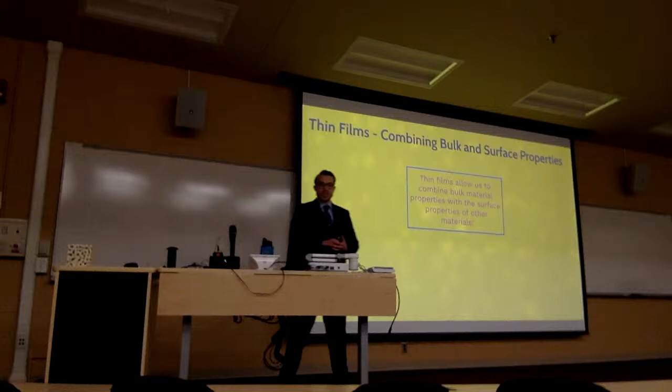Thin films as a class of materials allow us to combine bulk properties in materials with the surface properties of other materials. Whether we're talking about protective coatings, microelectronics, optical coatings, decorative coatings, or even tribological or hard coatings, just by applying a thin layer of material onto another, we can enhance the properties of those materials.

Now the performance of thin films in all of these applications depends strictly on how they're designed on the nanoscale. This is the crux of the story we're going to share with you today, so keep that in mind.

How thin films are typically engineered or designed is through a process known as physical vapor deposition. What the name implies is that we're actually vaporizing a material in a chamber, and it allows it to condense onto a substrate, another material, in very thin layers, in atomic layers, to grow a thin film material.

Why we use this process is that PVD allows us to control certain aspects of the microstructure, namely the shape, the spacing, the crystallography, and the chemistry of the thin film, which again plays into the properties in those applications I described before. So typical thin film architectures look something like this.

On the left, you have a fairly simple case where we deposit a material onto a substrate, and it might have some grain structure that we can describe with one length scale D. That's the grain size of that material.

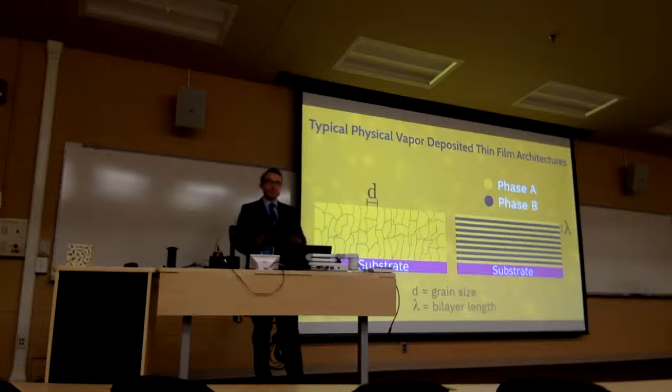Another material is actually a composite of two or more materials that we've layered sequentially in a multi-layered stack. We can also describe this with one length scale, lambda, and this is the bilayer length scale for that material.

Now this material on the right, this nanocomposite, is actually a very interesting material as it has interesting mechanical properties. I'll tell you why right now.

If we take a material, say copper in the bulk, which has a hardness of roughly 350 megapascals, and take another material, niobium, which has a higher hardness, you might think that if we combine these two materials in a composite, the hardness would be some value in between those. But in fact, if we make a thin film material at some layer thickness, say 40 nanometers in this stack, it has a high hardness, not between these two values, but much, much greater.

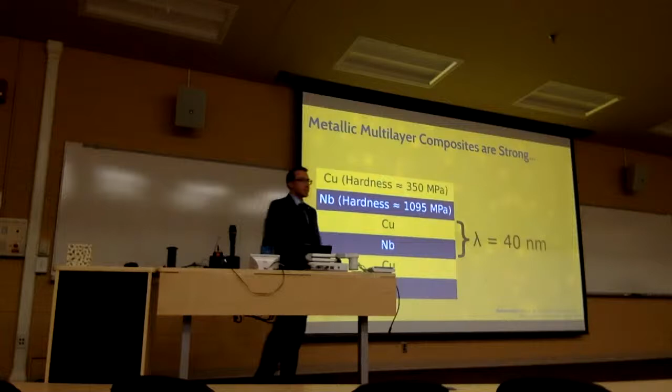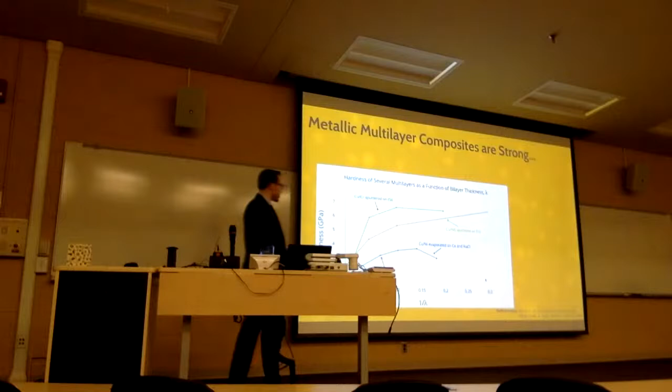Ultra high strength in this thin film architecture. In fact, that lambda parameter, as we decrease it in this plot here, which you can see going towards the right as a measure of hardness, you can see that as we decrease the lambda value for that nanocomposite, we increase the hardness of those materials.

So you might be thinking, well, that's great, we have ultra high strength in a material. So what's the problem? Well, if we load this sample up in compression, so we make this micropillar and compress it down, deform it, it actually has these ultra high strengths, but it fails very suddenly like a brittle material.

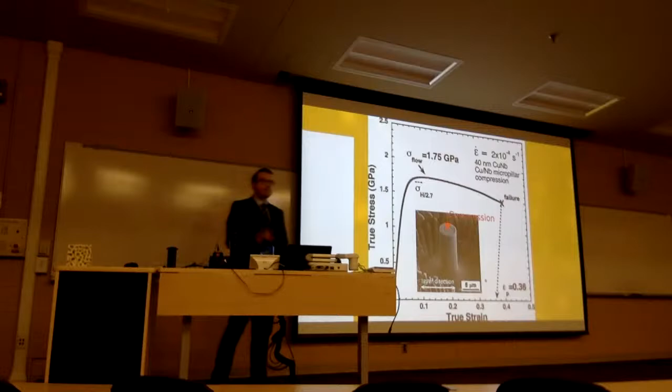The reason for that is this is the post-deformation sample. We can see that the plastic flow that we've created during deformation localizes into a single region in the sample known as a shear band, and that material fails very suddenly like a brittle material.

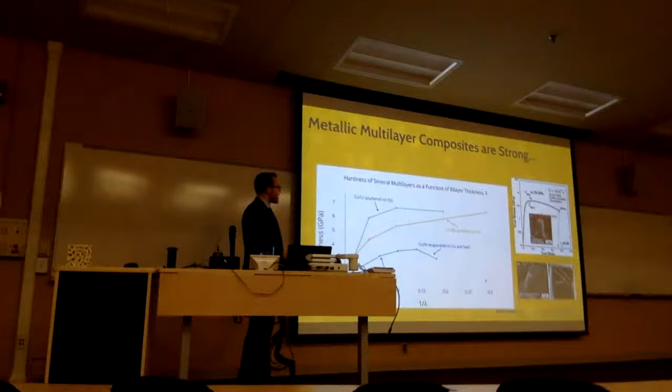So the question we ask in these nanocomposites: while we have the high strength in the material, they behave like a brittle material. Could we design a nanocomposite instead that's highly deformable but still has that ultra high strength in the material? We saw this as a design problem.

Previously we had these multi-layer stacks that fail suddenly. This is a TEM image of that sudden failure after deformation.

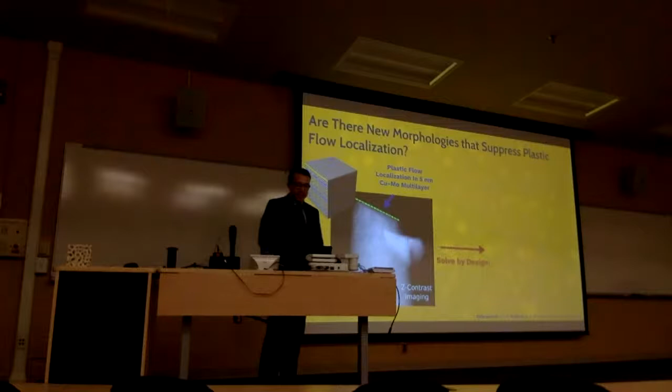What we saw is if we could possibly design a structure that instead looks like this, which you notice has interfaces not in 2 dimensions anymore, but in 3 dimensions, we can possibly distribute strain much more uniformly in the sample during deformation. So the question we ask then is, how do you engineer a material that looks like this?

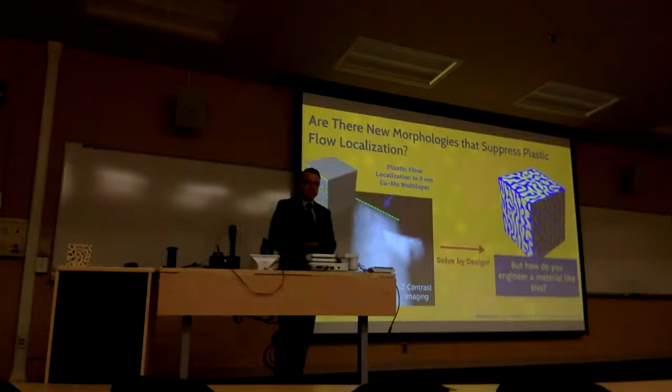Well, in fact, this structure here looks like, to some of us in the room, a phase-separated alloy, a phase-separated structure. And to a material scientist, phase separation looks something like this.

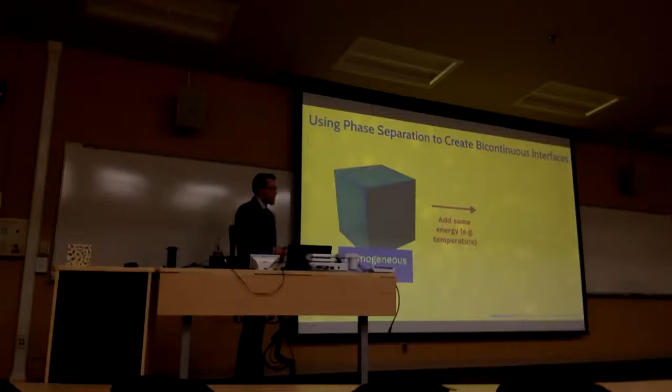We take a homogeneous alloy of a certain material combination, we give it some energy, for example temperature, and we can phase separate that alloy into 2 distinct domains—in this structure, the yellow and blue domains. We can actually design very sharp interfaces between those phase boundaries. Now, I said this occurs for very specific combinations of materials.

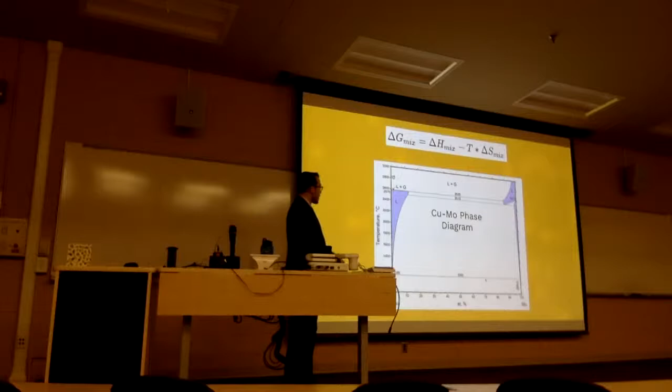What are those combinations? Well, if we look in our thermodynamics textbook, those are materials with high heats of mixing. These are materials that do not like to mix. For example, the copper-moly system. This is a copper-moly phase diagram where you can see it maps out temperature and composition, and you can see that this system is very insoluble.

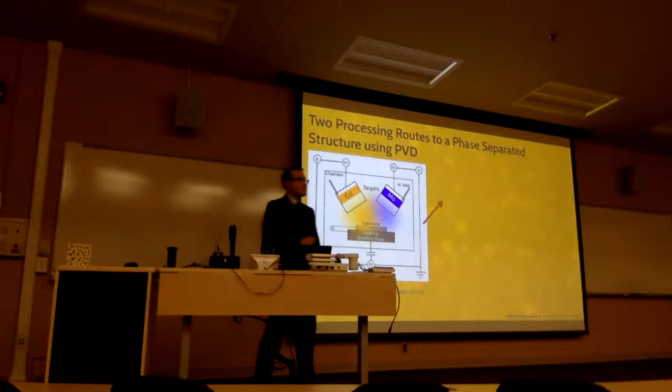An alloy or thin film that looks exactly like this on the right. So you can imagine doing this a few different ways using physical vapor deposition. Take, for example, we have a copper target and a moly target. We condense that onto a substrate. We might form a homogeneous alloy like I described before. We deposit an equal amount of those two materials. We could heat it up, and we could form this 3D bicontinuous-like structure that I described before.

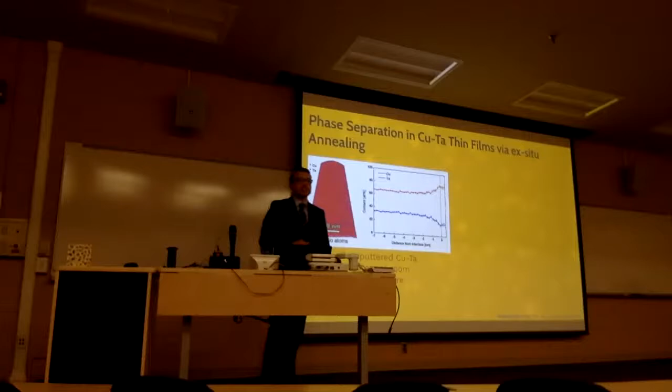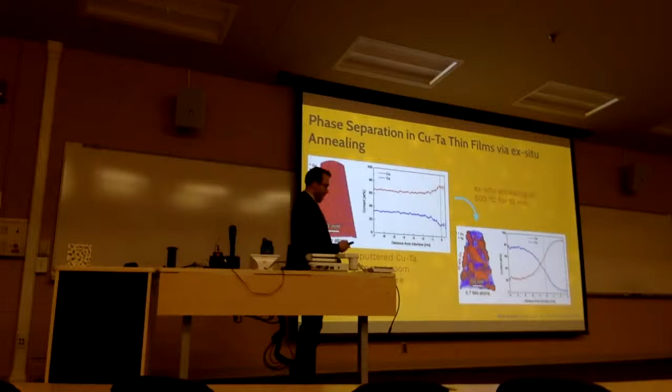We've actually seen this in the literature. So this is an example of a co-deposited copper tantalum system where the alloy at room temperature is homogeneous in the atom probe study here. We give it some temperature, and you can see that by adding temperature, we form this bicontinuous-like morphology for the copper and tantalum system.

So you might be saying, well, that's great. Why don't we just copy that processing route? Well, the problem is that it's kind of cumbersome. We have to take the alloy out of the chamber, we have to heat it up, and the resultant morphology is actually the same every time we do it. So we're actually limited in the number of morphologies that we can achieve using that processing route.

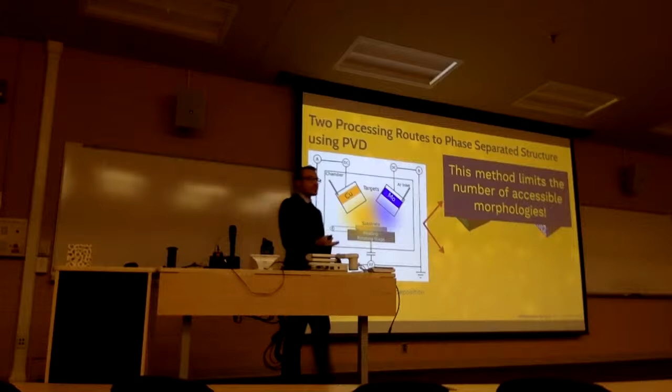So we thought, well, why don't we change it up? We can actually add energy during deposition by heating the substrate. So why don't we add temperature while we're depositing the material? We thought that in that case, we might be able to expand the number of morphologies that we could deposit using this processing route.

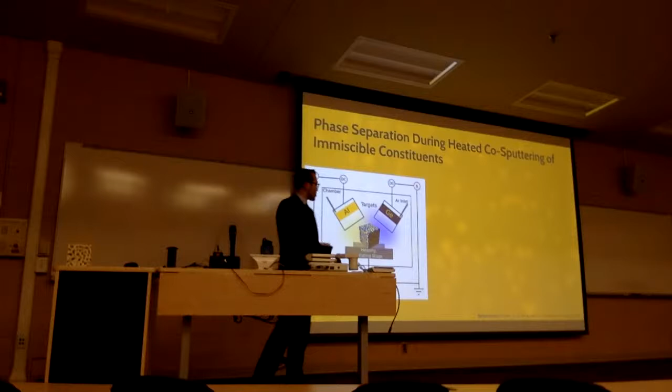We've actually seen this in literature as well. Actually led by one of my committee members, Dr. Michael Atzmon, led a study where they co-deposited aluminum germanium onto a heated substrate. And what they found was a bicontinuous-like morphology. Here are the resultant morphologies. You can see the aluminum-rich and germanium-rich phases highlighted here.

What they did was they varied the substrate temperature during deposition. What I hope you can point out here is that the sample coarsens as a function of substrate temperature. The domain size of the phase-separated architecture actually grows as a function of temperature. And that was one of the major findings of this work, is that we could actually control that phase separation process using the deposition conditions.

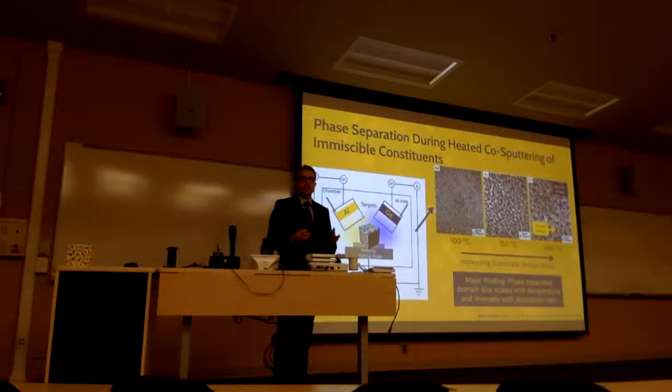So they actually tried to model this system analytically using one initial assumption, and that is that everything that's evolving, the concentration, is happening on the surface, the growing film surface. As in, the deposition time and temperature are such that no bulk diffusion is happening during deposition.

And so what they used was they used a Cahn-Hilliard formulation to describe this process, where they mapped out the concentration evolution over time as a function of the deposition conditions, namely the surface diffusivity, so how fast these atoms are traveling on the surface, the deposition rate, how fast we're adding material to the growing film, and the surface layer width, so how large is that layer that's actually evolving in concentration.

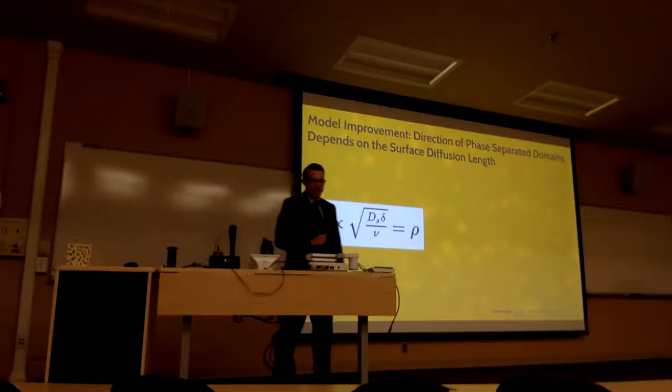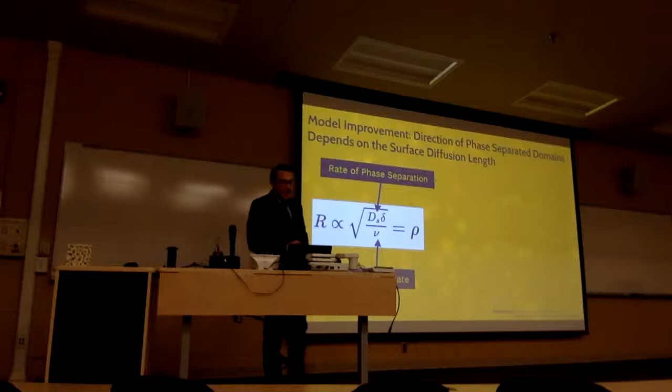This model was actually later improved upon by a group at Ohio State led by Yunzhi Wang, who saw this equation a little differently. They saw it as a competition between two different rates: the rate of phase separation, and the deposition rate during growth. The competition of these two rates can determine not only the size of the domains, but the direction of phase separation during thin film growth.

As a function of rho, this surface diffusion length, we can change the morphology or direction of concentration modulations in the sample. You can see these red and blue phases in this two-phase material. At high surface diffusion length, we have lateral concentration modulations, and as this rho value changes, we see the randomization of this morphology as a function of the deposition conditions.

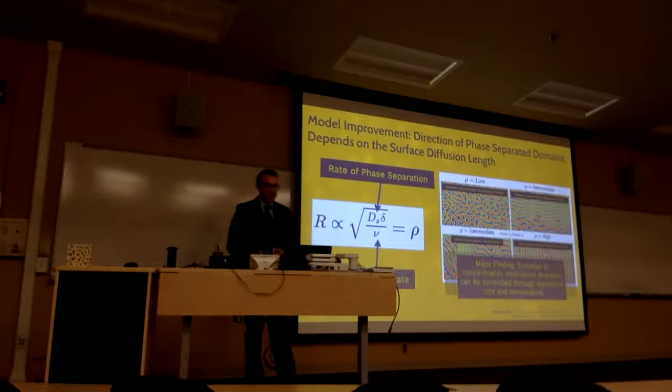So this was the major finding of this work: that you could change the direction of phase separation depending on the deposition conditions. We saw this as a scientific challenge. Could we take this understanding and replicate it experimentally during PVD deposition? Could we heat the substrate and give it the deposition conditions needed to change the surface diffusion length to change the direction of phase separation? Our hypothesis is that if we can control that diffusion length, we can control the direction of phase separation in these thin film morphologies.

I want to share with you the experimental methods we used for this study. We saw this equation as a function of deposition conditions. The two deposition conditions that feed into this equation are the deposition rate and the homologous temperature, which is the substrate temperature divided by the melting point of the material.

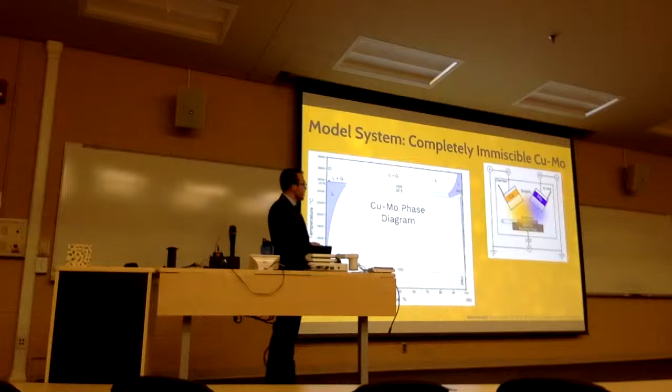We could deposit a matrix of samples to start seeing where those phase-separated morphologies fit on this morphology map. We took this ideal copper-moly phase diagram, a material system that is completely immiscible. We co-deposited it onto a heated substrate to force phase separation, and subjected it to a matrix of deposition conditions to map where those morphologies would fit on that morphology map.

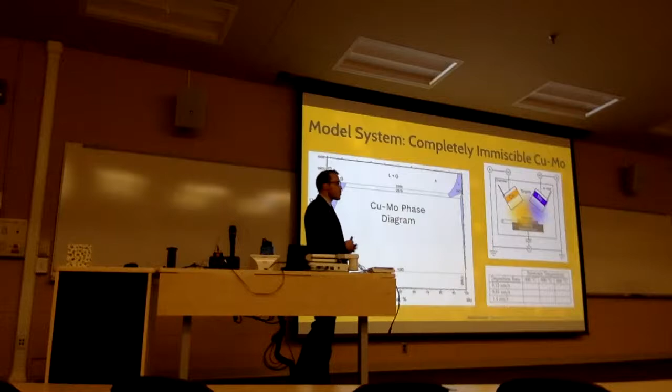We used a characterization technique known as scanning transmission electron microscopy to map out those phase boundaries and phase domains. We use atomic number contrast imaging to measure the shape and spacing of those domains. Chemical imaging can measure the chemistry of those domains. We look at the interface between the two materials in high resolution to examine the structure and defects of that interface, and we use electron diffraction to measure the crystallography and texture of the resultant films.

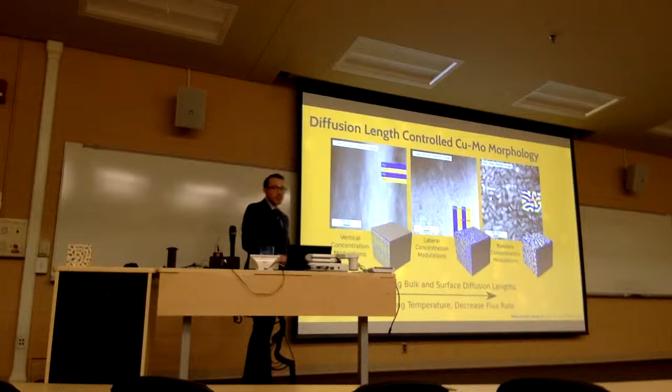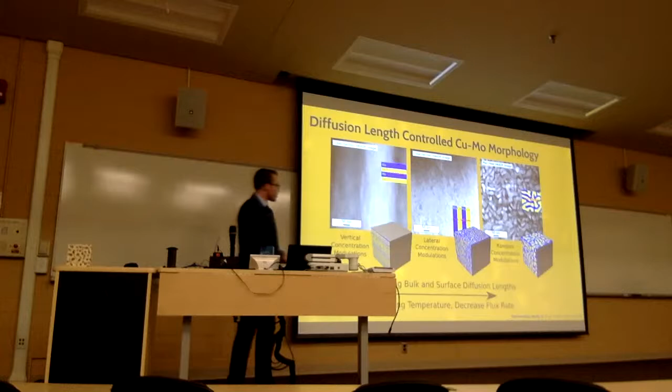So I've introduced that to you. What did we actually get? I'd like to share a summary of the thin film architectures we designed using this process. These are all atomic number contrast images, where copper is darker and brighter regions represent the moly-rich domains. You can see the length scale of these three morphologies and how the concentration evolves as a function of the deposition conditions labeled here. You don't have to take this all in, because we'll describe them each in turn.

At the lowest deposition temperature, we achieved vertical concentration modulations of copper and molybdenum. This is two views of the sample, one in cross section and one in plan view, looking down onto the film. The film growth direction is indicated in the cross section image. We have copper-rich and moly-rich domains stacked vertically in the sample, at a length scale of about 11 nanometers, which you can see in the chemical mapping image in the upper right inset.

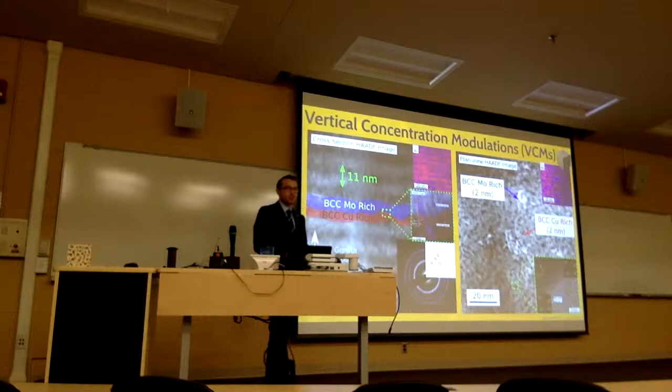If we look into these two domains, there's actual lateral character to the copper and moly-rich domains that extends into the thickness of each layer. What's really interesting is that if we measure the crystallography, we only pick up frequencies from the body-centered cubic crystal structure, represented by moly, which is the equilibrium moly crystal structure. But bulk copper's equilibrium crystal structure is actually face-centered cubic. So what we have here is a metastable copper layer, coherent with the BCC moly-rich layer.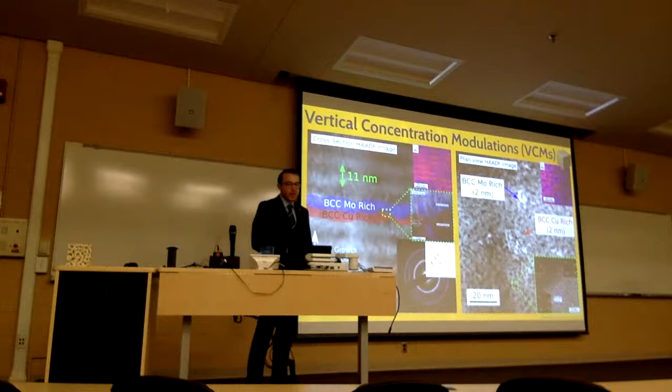I'll show you that in detail in just a second. In plan view, when we look at the sample from top down, you can see this tortuous-like morphology into the thickness of the film with copper and moly-rich domains. If we look at the interface between those two crystals in high resolution, you can see that copper is strained to match the lattice parameter of moly into a BCC crystal structure, forming a coherent interface between the two crystals.

So in summary, what we have is a crystallographically coherent, chemically separated vertical design of the material. At slightly higher temperature, we change the direction of phase separation 90 degrees into lateral concentration modulations of copper and molybdenum. You can see that in the chemical imaging at an approximate length scale of 7 nanometers.

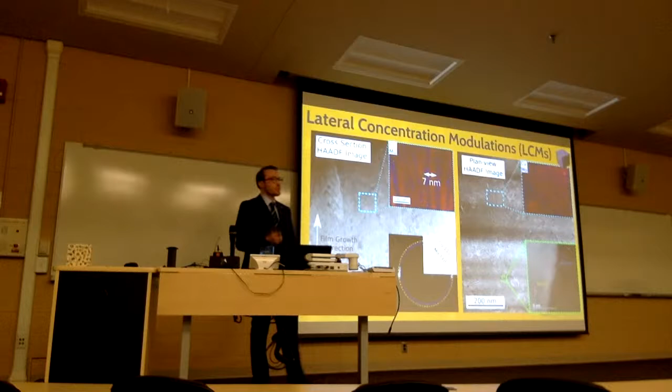If we take a look at the crystallography of the sample, what we see is actually the two equilibrium crystal structures for both constituents, FCC copper and BCC moly, when we look at the film top down. We can pick out frequencies in that crystallography measurement and see that this film is highly textured when we pick out one of those peaks and measure the sample at dark field TEM.

If we look more closely at the interface between the BCC moly and FCC copper, you can see that this forms a semi-coherent interface between the two crystals, with a Kurdjumov-Sachs orientation relationship. An orientation relationship describes how two crystals are aligned with one another. It describes a set of parallel planes and parallel directions.

Here's what that looks like schematically, where we've matched up body-centered and face-centered cubic material at the interface. What's really interesting about this structure is that we have misfit dislocations at the interface that actually help describe some of the mechanical performance we see in this material. You can see those misfit dislocations described here.

So in summary, at this temperature and deposition condition, we have a crystallographically semi-coherent, chemically separated lateral design. At the high temperature, you can see where this is going.

We actually have a randomization of those phases in both cross-section and plan view. We can see we have a much more random crystal grain orientation in the sample. We've lost some texture and have a much more tortuous, bicontinuous-like morphology in both of those views. So here we have a random design in the morphology.

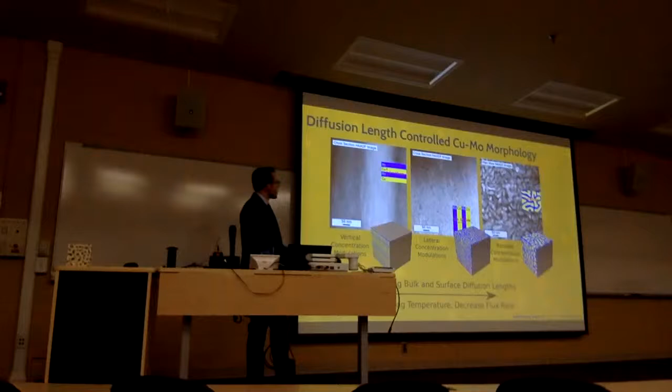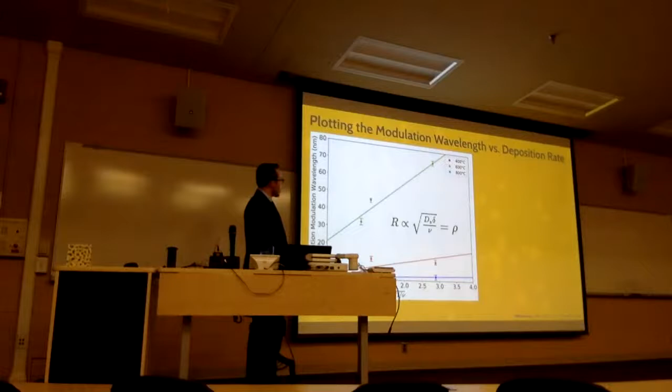So in summary, here are those three morphologies. We wanted to match up our empirical results to the analytical model put forth by Dr. Michael Atzmon's group. We saw this relationship once again, which describes the domain size proportional to the square root of 1 over the deposition rate.

So we tried to map out that R value, or concentration modulation, as a function of the square root of 1 over deposition rate. We saw that our experimental results actually match well with what was predicted by this model.

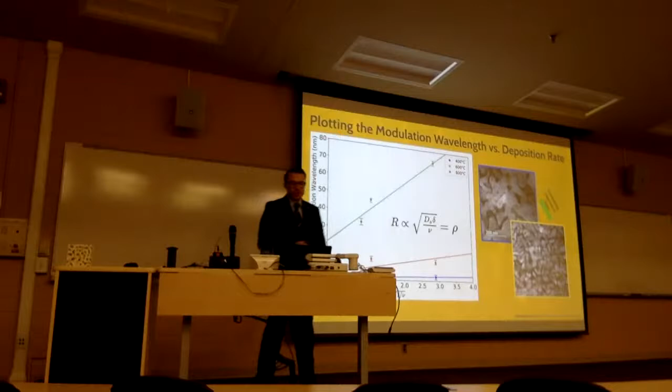Experimentally, we can show that at a particular temperature, 800 degrees C, by increasing the deposition rate, we can refine the structure in the sample. So we can see that this model actually describes our system and our empirical results.

So in conclusion, through the PVD conditions, we can control the direction of phase separation by controlling that diffusion length in the sample during deposition. And so if you come to me wanting to design your material in a very specific way...

The next challenge we saw is, can we develop some sort of predictive control over these morphologies? Could I tell you the deposition conditions you need to design your material in a very specific way? Our hypothesis is that by understanding how the deposition conditions play into that diffusion length, we can start to predict these phase-separated morphologies.

Starting with this equation, matching it up with our empirical results, the Yunzhi Wang group at Ohio State put forth a morphology map based on their phase field simulation that describes the phase fraction of the material against a normalized deposition rate. Don't let that confuse you, that's just the inverse of the surface diffusion length proposed by Dr. Atzmon's group. Our material has equal amounts of the two materials, so 50% fraction.

You can see that depending on the surface diffusion length, you can actually change the direction of phase separation using those deposition conditions.

So what I'd like to describe is each of those morphologies in turn and how they develop. First off is the LCM phase-separated morphology, which occurs when we have a high surface diffusion length.

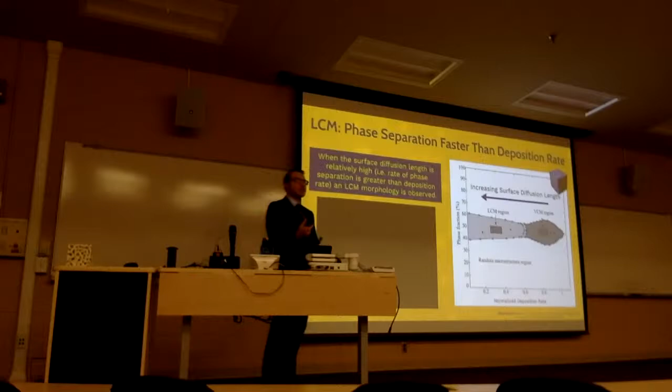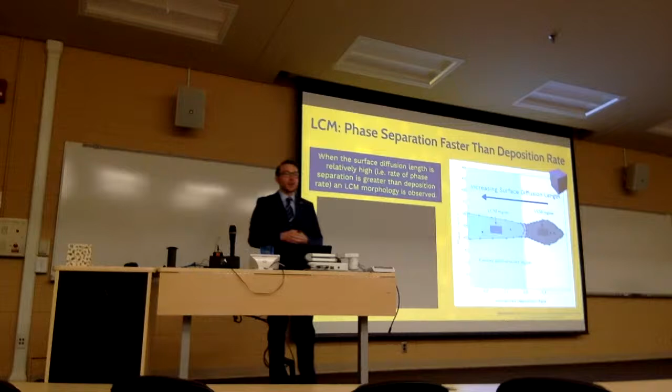What's happening here is that the rate of phase separation is much greater than the deposition rate. As the sample is being deposited, equal amounts of yellow and blue atoms deposit onto the substrate and have enough time to diffuse and phase separate before the next layer arrives. The next layer of like atoms simply finds regions of like phase underneath, building up into this LCM-like morphology you can see schematically in this corner.

Now, at slightly lower diffusion length, we see a transition in phase separation direction to the VCM structure. Here, the rate of phase separation is roughly equivalent to the deposition rate.

Looking more closely, what we predict is happening is described here as increasing film thickness as you go down the page. In the first few layers of deposition, the system tries to phase separate into red and blue rich regions. Unfortunately, by the time the next layer arrives on the substrate, that underlying layer hasn't reached terminal composition or fully demixed on the substrate. So that first layer starts stealing like atoms from the second layer, forming a chessboard or checkerboard-like structure.

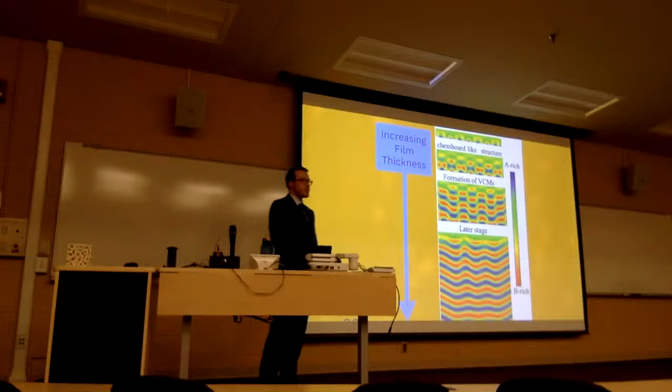Surface energy arguments then start to interconnect those phase-separated domains, and you can see at later stages of deposition we have a VCM-like morphology at lower diffusion length.

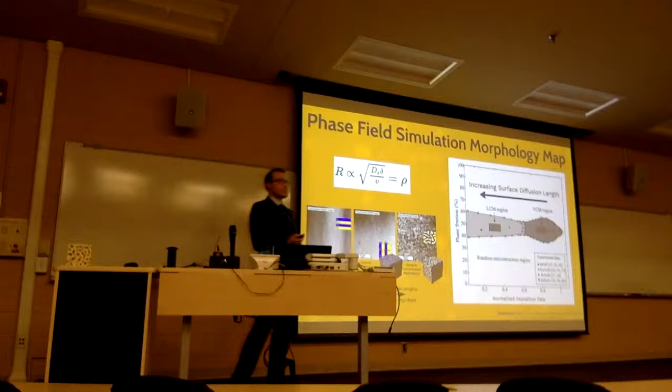But one thing you might notice is that our empirical results, based on diffusion length, actually predict random concentration modulations at the highest diffusion lengths during deposition. Our morphology map, however, only predicts two of those morphologies - we can put VCM and LCM on there, but our empirical results suggest RCM should be to the left in that plot. So this model doesn't actually predict that RCM-like structure.

What's happening here is that the RCM structure is inherently 3-dimensional. This morphology map was done by a 2D phase field simulation, so we extended our model into 3 dimensions in phase field to actually predict this RCM-like morphology. Here are the results of our phase field simulation.

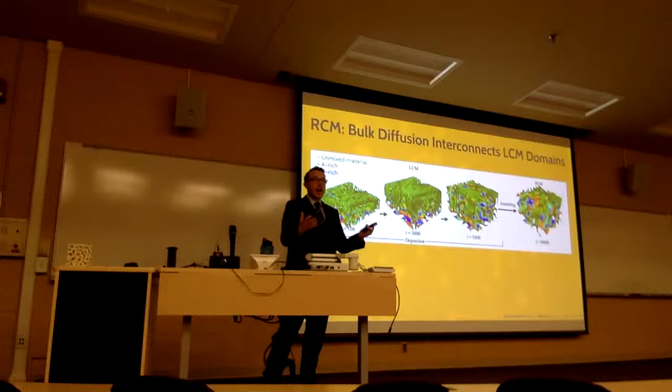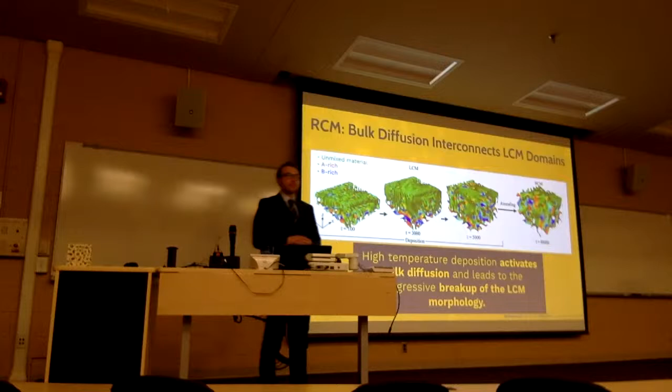What you can see here is that the system tries, at high temperature, to form this LCM-like morphology. But at this higher temperature, we've actually activated bulk diffusion, and that bulk diffusion leads to the breakup of the LCM-like morphology into a much more random, interconnected structure like we saw in experiment.

So we were actually able to form a 3D morphology map, which you can see plotted here, predicting the RCM-like morphology. You can see the regions of those morphologies labeled here.

We applied all of our empirical results onto our own morphology map, which is a function of deposition rate and deposition temperature. You can see those morphologies labeled here, and our results actually match up very well. If you just follow one deposition rate while increasing the temperature, which increases the mobility of the constituents, you can actually see agreement with our empirical or experimental results.

Now this plot was only made for a certain set of mobilities, but we actually phase simulated mobilities much greater than that, which predicts this RCM structure - it's just not included in this plot.

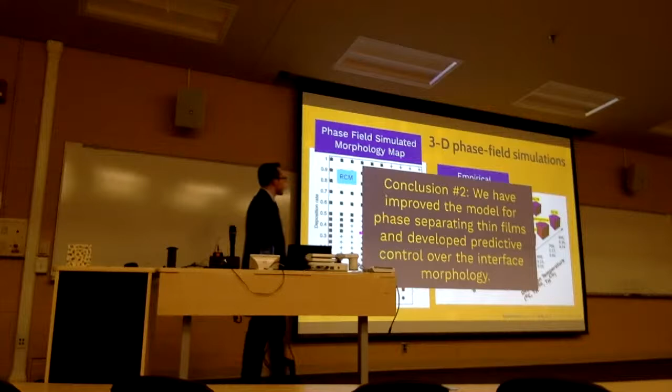So the second conclusion we can make is that we've been able to improve the model for phase separating thin films and design some sort of predictive control over the interface morphology.

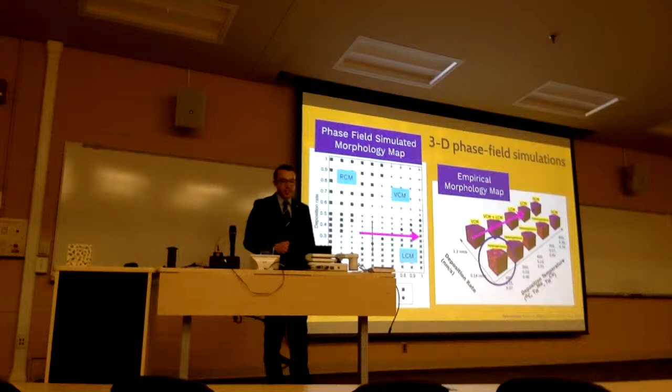One thing I've kind of been hiding from you on this experimental morphology map is that we see a completely different morphology at the lowest deposition rates we experimented with in this study. You can see that it's actually not a homogeneous-like morphology, but in fact hierarchical or heterogeneous. That's where I want to go next - it's actually a phase-separated structure that has multiple lengths or multiple scales of phase separation during deposition.

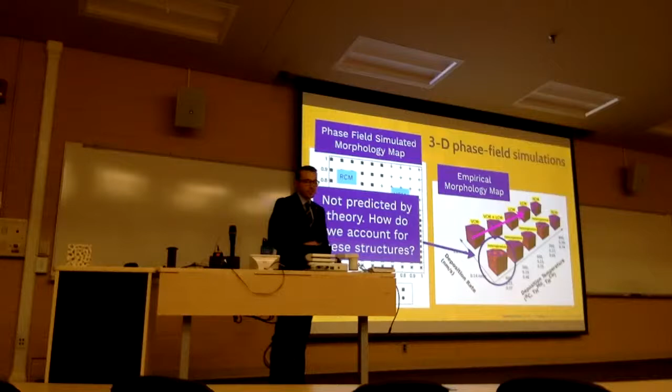We actually dub these composites of composites. But if you look at our model, it doesn't actually predict the structure or hierarchical-like morphology based on the deposition conditions. So we ask the question, how do we account for these structures? That's where I'd like to go next, describing these hierarchical phase separations during deposition.

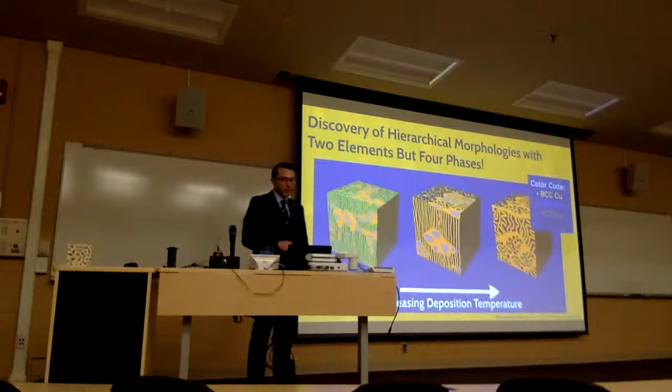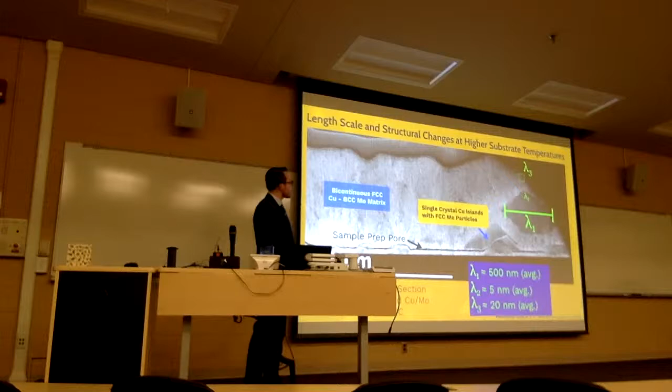At slightly higher temperature, we actually coarsen the structure quite considerably. You can see lambda 1, these lambda values have increased. If we look inside those islands, we still have a bicontinuous matrix with single crystal islands scattered throughout. If we look inside that island, we can again see those FCC moly particles scattered within, and you can see they've lost some ordering inside that copper-rich island.

So what we have is larger pseudomorphic FCC moly precipitates. The matrix is again an LCM-like morphology with lateral concentration modulations of copper and molybdenum, as shown in this chemical map. By measuring the crystallography, we've achieved equilibrium copper and equilibrium moly. If you look at the interface between those two crystals, we've again designed a semi-coherent interface in a Kurdjumov-Sachs orientation relationship. So here we have a highly textured FCC copper BCC moly matrix.

At the highest temperature, you can see where this is going. We've coarsened the sample again quite considerably. We can see that we've actually designed moly particles inside those islands that are the equilibrium crystal structure, or body-centered cubic crystal for the moly particles. And again, the interface with copper is in a Kurdjumov-Sachs orientation relationship.

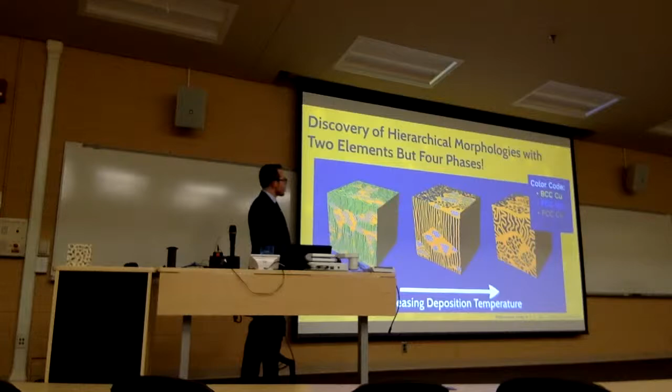So here's again a summary of those results in schematic form. We apply them to our morphology map that we described before. But the scientific challenge is, can we develop some sort of predictive control? None of the models we described before predict this sort of morphology, neither the 2D phase field or the 3D phase field simulation that we did. What's really interesting is that both of these models actually describe a single surface interdiffusion length, which is actually an average between the surface diffusion lengths of both of those constituents.

We hypothesize that we can't consider just the interdiffusion length. We have to consider the diffusion length for both of the constituent species. What do I mean? We need to describe the mobility difference between the two adatoms, or two constituents, to describe this morphology.

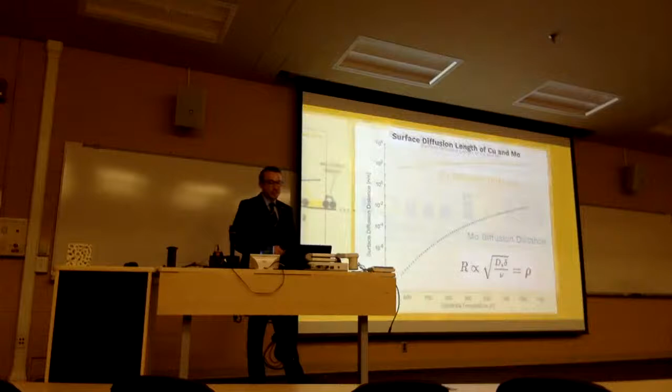If you look at the mobility between copper and moly adatoms, copper is much more mobile than the molybdenum atoms at the temperatures we deposited in this study. That translates to a diffusion distance much larger for the more mobile species, copper, than molybdenum. Schematically, at early stages of deposition, you can see these two adatoms on the surface, one much more mobile than the other.

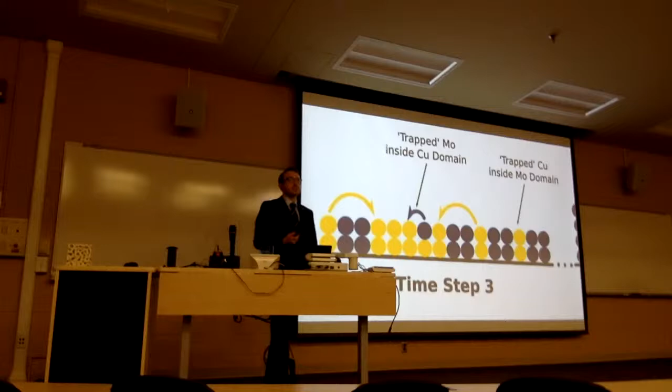As this structure builds up, it attempts to form an LCM-like morphology, or phase separate, but the copper adatoms can jump or travel much farther than those blue, slower mobile species. Because the system prefers to demix, we have an agglomeration of copper in the structure, and any moly that gets deposited inside that domain can't travel outside of it. That's what we think gives rise to those pseudomorphic moly precipitates inside the structure.

So what we can conclude is that, at the very least, we need to improve the models described before. We think we need to consider the mobility differences between the constituents during deposition.

I've described many different morphologies so far. As the title of this talk suggests, we're interested in the mechanical performance of these films, so let's look at the performance.

We wanted to consider two different extreme environments that we applied these materials to. The first being mechanical deformation — these hard, tribological coatings are used in mechanical applications as protective coatings, so they need to be hard. They're also used in nuclear radiation environments, such as fusion reactors, as cladding inside the nuclear reactor.

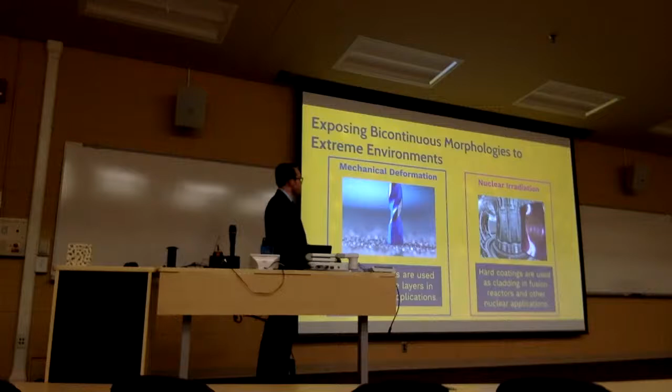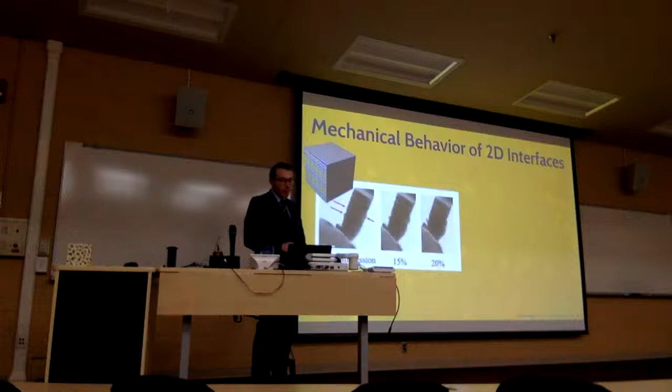Let's start with the mechanical deformation. We know how 2D materials, or materials with 2D interfaces like the one I imaged here, behave under compression — they behave like a brittle material. All the plastic flow in the material localizes into a single shear band, and the material fails very suddenly.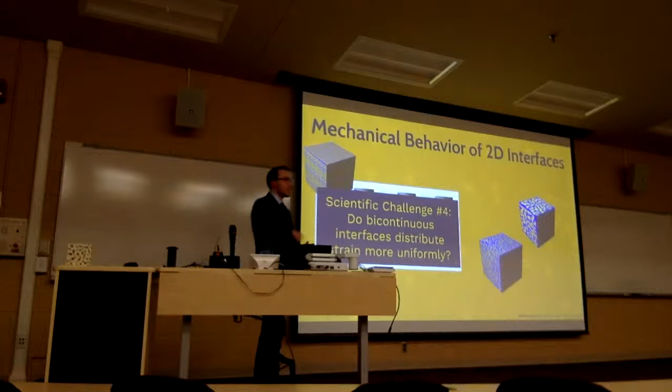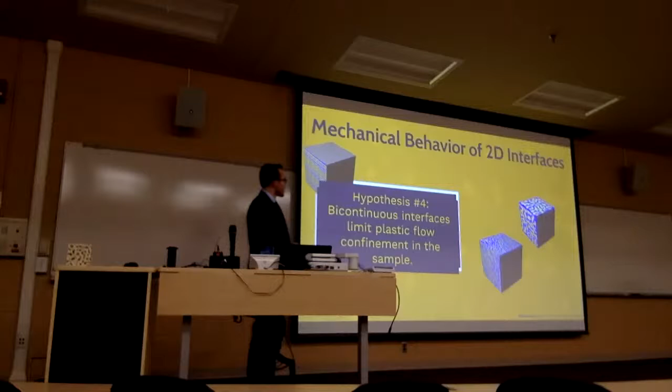Because of flow localization, the scientific challenge is: do bicontinuous interfaces, when extended in three dimensions, distribute strain much more uniformly? We have these types of morphologies to play with. Our hypothesis is that plastic flow is no longer confined in the sample, and the sample can be much more deformable. My colleague Yushi Sui here at Michigan led a study where he compressed these three morphologies in a novel TEM experiment.

This gave us the resultant stress-strain curve for each of these morphologies, labeled here. What I'd like to highlight is that the VCM structure behaved much like a multi-layer-like design, which has high strength but limited deformability. The LCM morphology had enhanced deformability due to the presence of semi-coherent interfaces. Finally, the random concentration modulated sample had an excellent combination of both high flow strength and plastic deformability.

So the conclusion here is that bicontinuous copper-moly structures prove to be both strong and plastically deformable in compression. How did the hierarchical morphologies behave?

Very similarly. We compared the multi-layer design to a hierarchical-like morphology, in this case the sample deposited at 400 degrees C. We saw that the multi-layer copper-moly sample loaded to 2.8 gigapascals, but failed suddenly due to shear banding in the material, as you can see using this TEM image of the sample here.

The hierarchical morphology strain hardened at high strain rates and distributed plastic strain much more uniformly, and we didn't see examples of shear banding after compression. That's the mechanical behavior of the sample, and now the other environment.

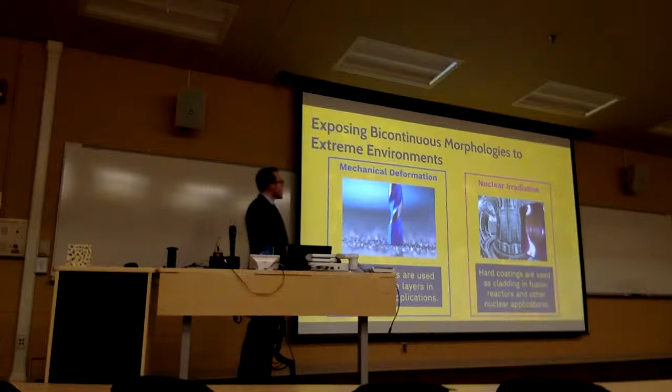Nuclear radiation is actually an important aspect that uses thin films in the application.

In neutron irradiation, such as in a fusion reactor, materials behave very interestingly. When they're struck by a high energy neutron, we get a cascade of damage inside the material. We can have defects such as interstitials and voids, and the creation through nuclear transmutation of helium inside the metallic sample. Helium is completely insoluble with any metal, so we start to develop porosity inside the sample as the irradiation dose increases.

Take this fully dense tungsten sample. As we hit it with neutron irradiation, the sample develops pores throughout the material. We dub this tungsten fuzz because it develops into this porous-like structure, and this material embrittles at high irradiation dose. That becomes a problem if we're using these materials in a fusion reactor or nuclear application. We observe helium that gets trapped inside the metal and eventually embrittles the material until it fails.

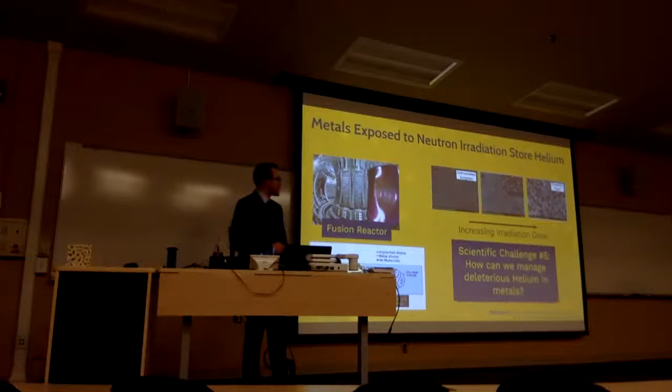So the scientific challenge here is how can we manage deleterious helium that gets trapped inside the material. You could think of two approaches to solve this problem. One approach might be to confine helium in very specific locations inside the sample.

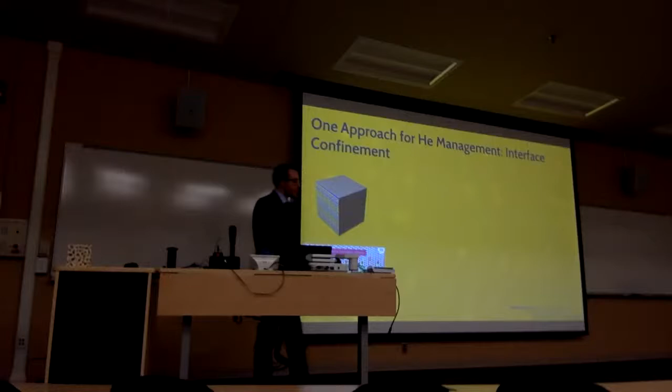This multi-layer design, like I described before, if we interface a BCC and FCC material, we create misfit dislocations across the interface. These are very useful in terms of helium entrapment, as helium atoms like to diffuse to that location at the interface. We can see this in a simulated model where we implant helium inside the sample. It diffuses to the interface, and those misfit dislocations act as traps between those two layers.

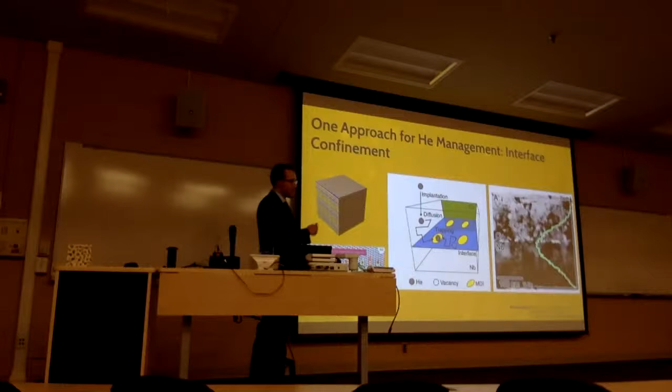We've actually seen this experimentally. This is a copper niobium multilayer. You can see the development of helium bubbles inside the sample due to helium production. This green plot measures the density or accumulation of helium across the thickness of the sample. You can see that the helium density is much greater at the interface as opposed to the thickness of each of those layers.

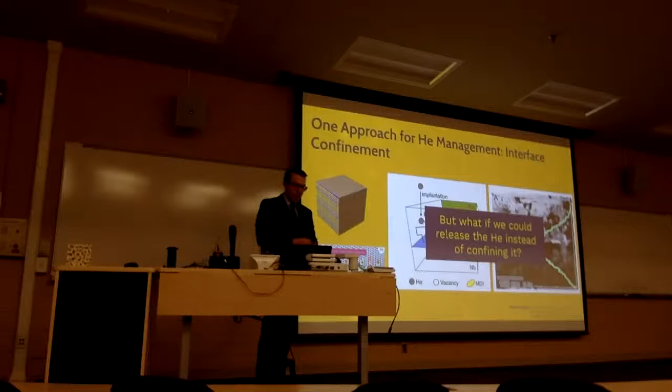But what if, instead of confining the helium at the interface, we were allowed to flush it out during irradiation? What if, instead of confining it at the interfaces, we could just let it escape outside the surface? That would put an upper limit to how embrittled the material can become.

Recent studies concluded that if you can design interfaces very specifically, you could develop nanochannels of helium bubbles at an interface, and if those interfaces extend to the surface of the material, that helium could be flushed out at the surface. Well, we have very interesting structures that do have interfaces that extend in 3 dimensions to the surface.

So we asked the question: what if we were able to implant these samples with helium and see if there was a development of nanochannels to allow for the escape of helium in a nuclear environment? Our hypothesis is that these bicontinuous interfaces that extend to the surface can facilitate helium escape through the surface.

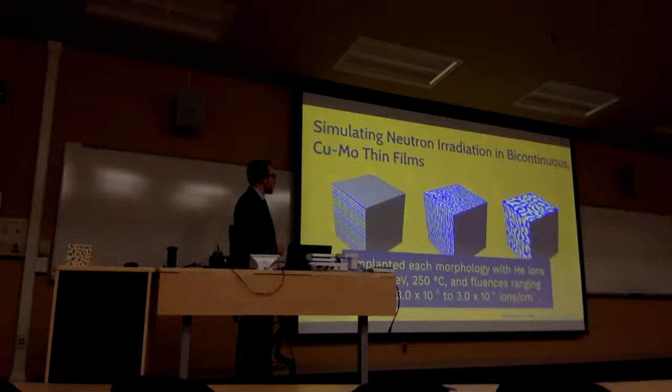So what we did is we simulated a neutron irradiation environment by implanting helium into these 3 different structures at a certain energy and temperature and a range of fluences of helium ions. I want to describe to you one of the results in the structure.

This is the bicontinuous structure, and I've blown up this image here in bright field. Hopefully you can see that the structure is littered with helium bubbles inside the structure, but the helium bubbles, as pointed out by these pink arrows, inside the blue moly-rich and copper-rich domains, actually confine themselves to the FCC-BCC interface. So these helium bubbles behave like inside the copper multi-layer design, and confine themselves to the interface.

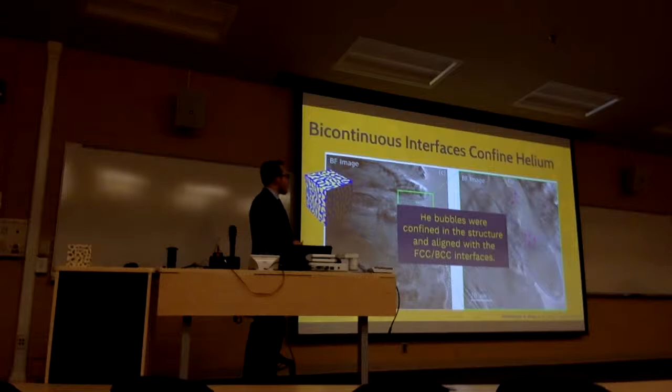If we map out helium retention in the sample as a function of dose or fluence, we can see that we have allowed some of the helium to escape through the material surface. Here's a plot of helium retention, how much helium is being contained inside the sample as a function of fluence, how much helium we're actually implanting inside the sample. The black line represents a material where all the helium that gets implanted gets contained and confined inside the sample. The other colored lines represent our morphologies.

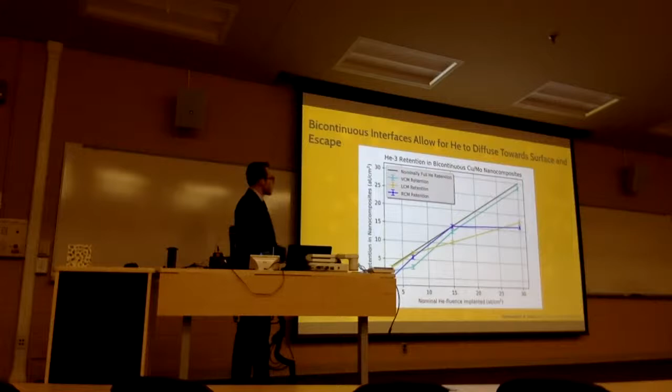What I hope you can see here is that the LCM and BCM morphologies actually allow for some of the helium to escape at high fluences. You can see as we increase the fluence, that retention of helium inside the sample starts to decrease. So what we think is happening, based on these representative morphologies, is...

that bicontinuous interfaces actually allow helium to diffuse along the phase boundaries and escape from the interface at the surface. So I've described a lot of different topics today, and what I'd like to do now is describe a summary of those results.

First, on synthesis physics: we were able to control the direction of phase separation by manipulating the diffusion length during deposition. We developed predictive control over the morphology by extending our model in 3 dimensions, our phase field simulation in 3 dimensions.

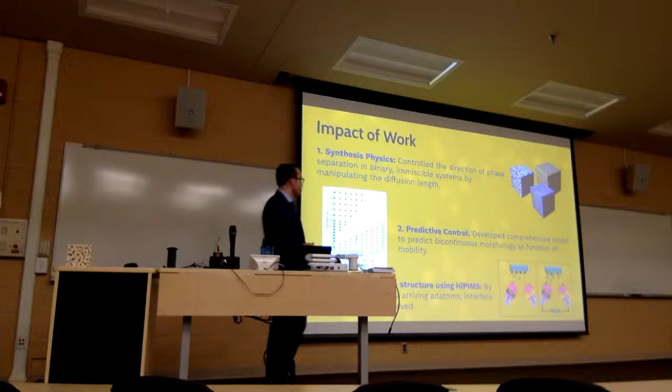What I didn't show in this work is that we actually developed a new deposition technique known as HiPIMS to control the morphology even further. We designed these hierarchical novel materials where we have phase separation happening at different length scales in the sample.

We tested the mechanical response by deforming these samples inside the TEM and seeing how they behave, and they deform much more uniformly. We also experimented with implanting these samples and exposing them to irradiation, seeing how they retain helium inside the sample.

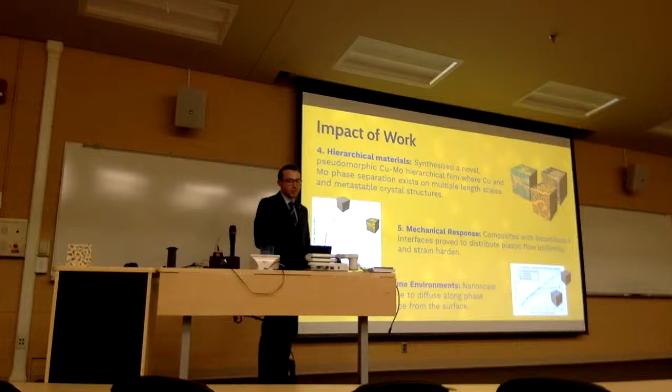So we did a whole slew of different experiments in this work, but I'd like to stress that the impact of this work goes much beyond just thin film design. It can actually impact materials design across material science. We can use these results in bulk materials to improve the design of materials and improve their performance in various applications.

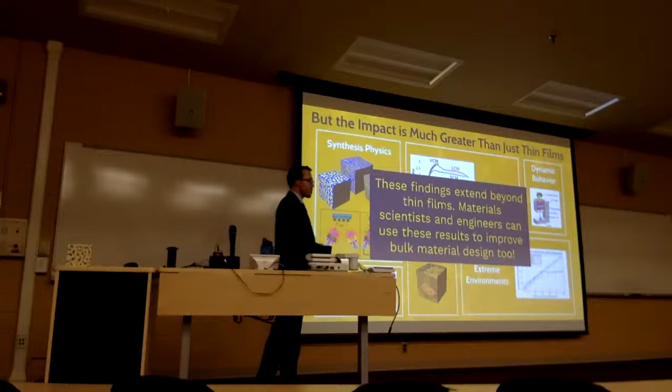So I'd like to point you to the publications that we have on this work, and please read them for more information.